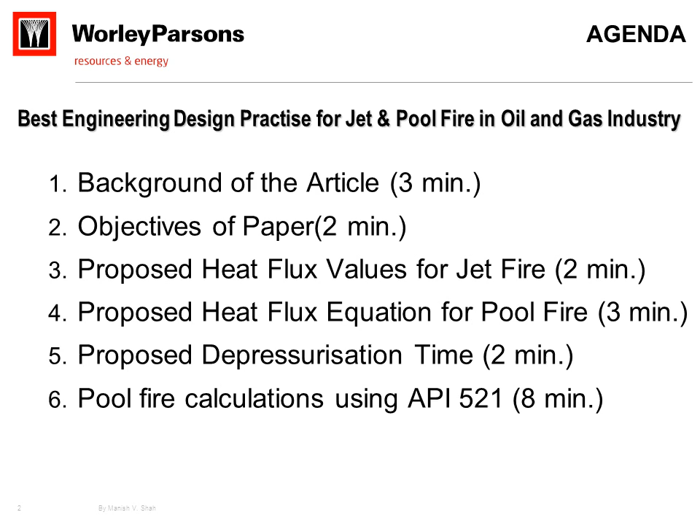Agenda: we will start with background of the article, then objective of the paper, followed by proposed heat flux values for jet fire, proposed heat flux equation for the pool fire, proposed depressurization time, and at the end pool fire calculation using API 521.

These two guidelines discuss the application and the limitations of API 521. So all process and safety engineers need to study both the guidelines as it covers the various safety design aspects for oil and gas units.

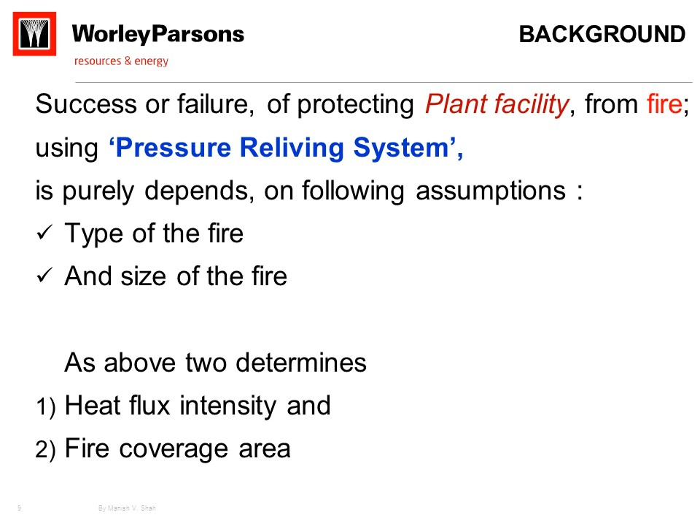The success or failure of protecting plant facilities from fire using a pressure relieving system purely depends on the following assumptions: the type of the fire and the size of the fire, as above two determine the heat flux intensity and the fire coverage area.

API 521 covers the following fire scenario: open pool fire or fuel control pool fire. This is mainly for refinery and chemical plant, which means small to medium size of the fire. In open or fuel control fire, air is in excess while hydrocarbon fuel is limited. Example is fire on open ground.

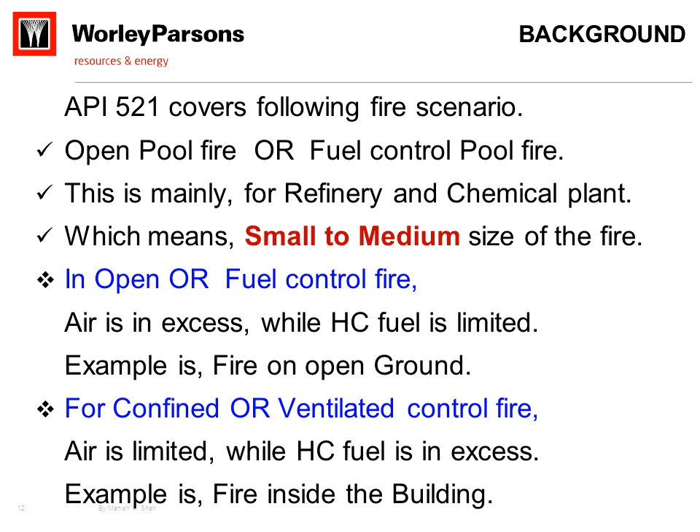For confined or ventilated control fire, air is limited while hydrocarbon fuel is in excess. Example is fire inside the building.

API 521 does not cover the following fire scenarios: confined pool fire, big pool fire, open jet fire, confined jet fire, severe fire or any other fire. For these types of fire, API will not ensure fully safe design, as the failure mechanism, heat flux intensity and the fire area are much different than open pool fire.

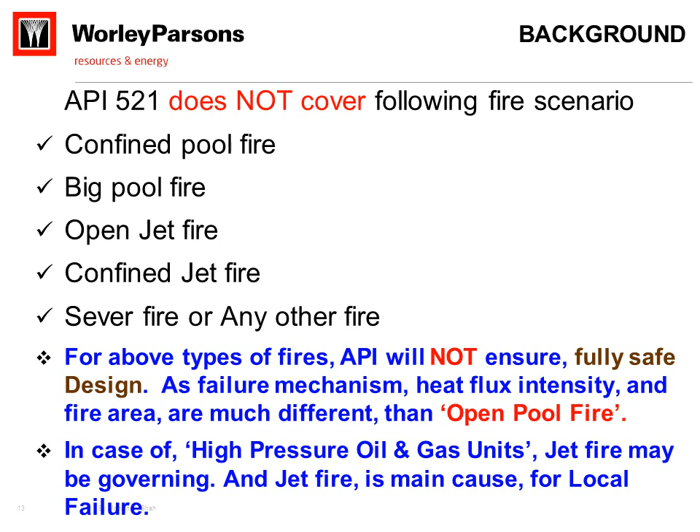In case of high pressure oil and gas units, jet fire may be governing, and jet fire is the main cause for local failure.

API 521 mainly concentrates on overpressure failure and its prevention. API 521 indirectly talks about local failure, but API 521 does not specify any specific requirements for local failure analysis of process components. These process components are vessels and pipes.

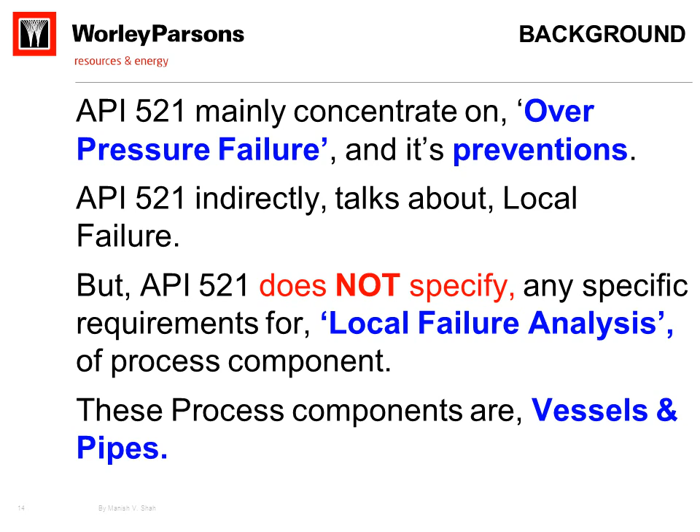Local failure is due to high local heat flux, wherein a component engulfs in the flame of a pool fire or is impinged by the jet flame. The gas process segment or the thin process segment can fail easily due to high local heat flux.

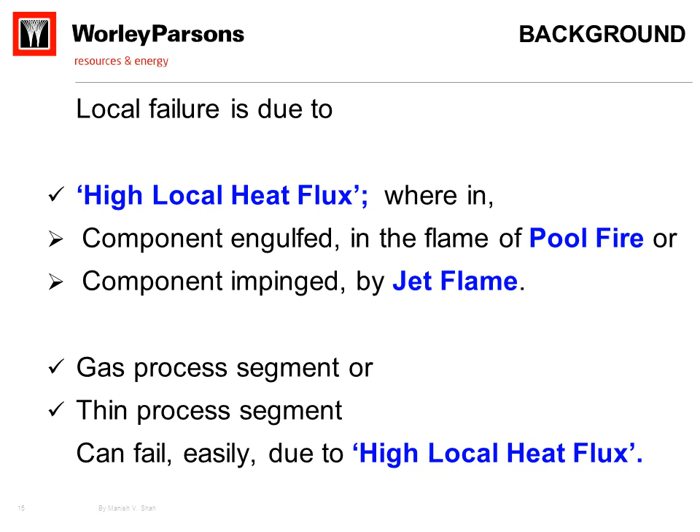API 521 is silent on protecting weak process segments by passive fire protection. These segments are thin pipes, bends, flange joints, pump seals, control valves, abnormal pipe expansion due to the fire.

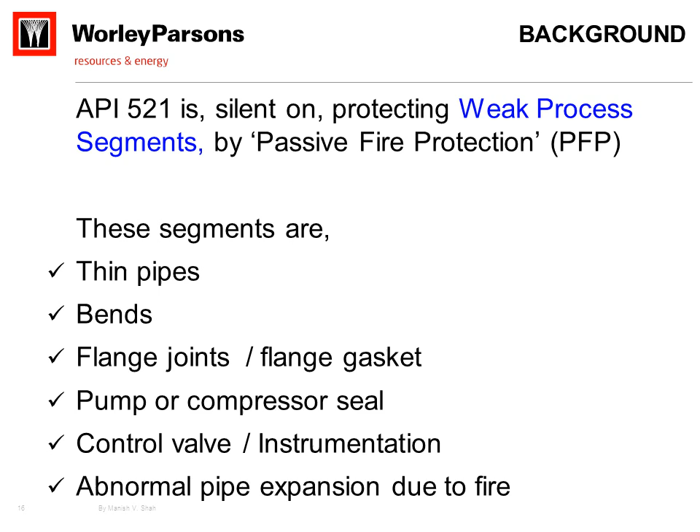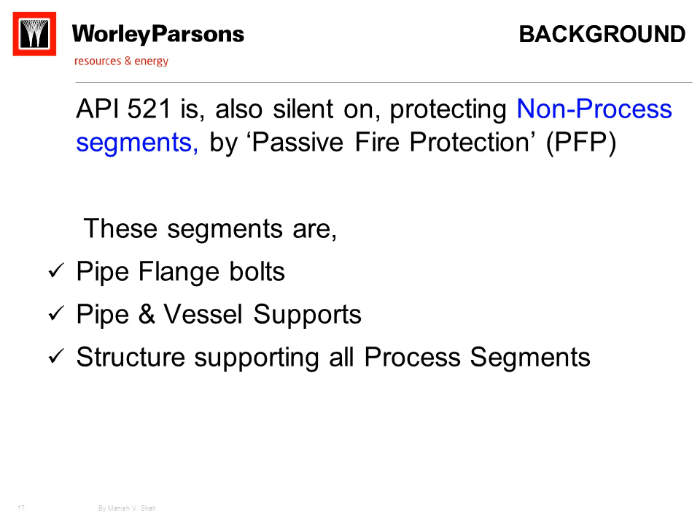API 521 is also silent on protecting non-process segments by passive fire protection. These segments are pipe flange bolts, pipe and vessel supports, and structures supporting all process segments.

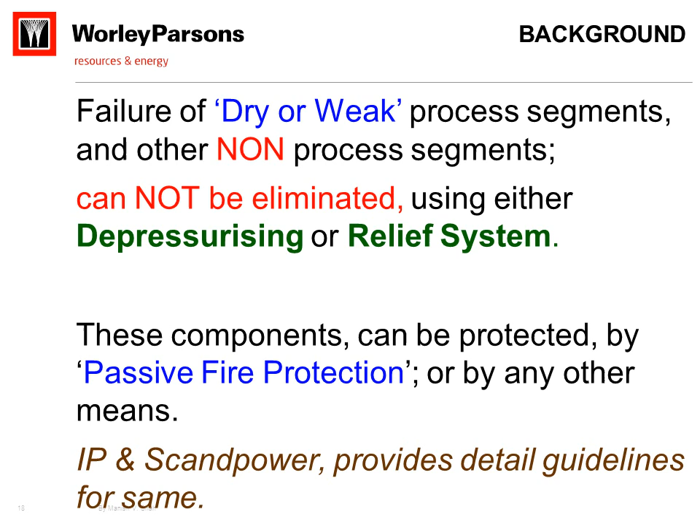The failure of weak process segments and other non-process segments cannot be eliminated using either depressurizing or relief systems. These components can be protected by passive fire protection or by any other means. IP and Scandpower provide detailed guidelines for the same.

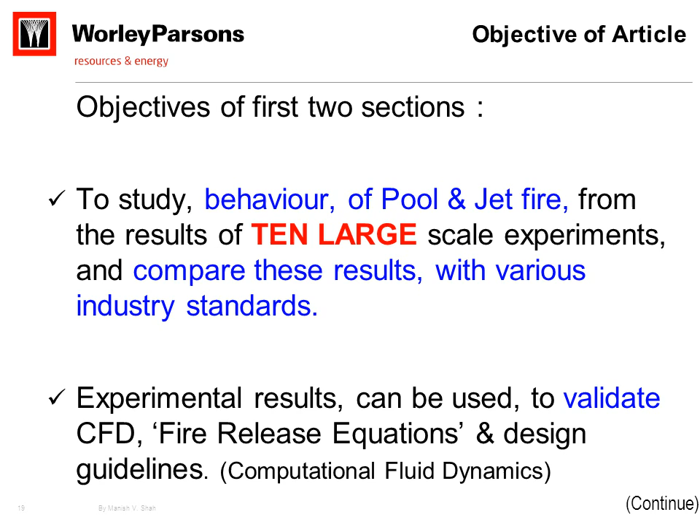Objectives of the first two sections: to study the behavior of pool and jet fire from the results of 10 large-scale experiments and compare these results with various industry standards. The experimental results can be used to validate CFD, fire release equations and design guidelines.

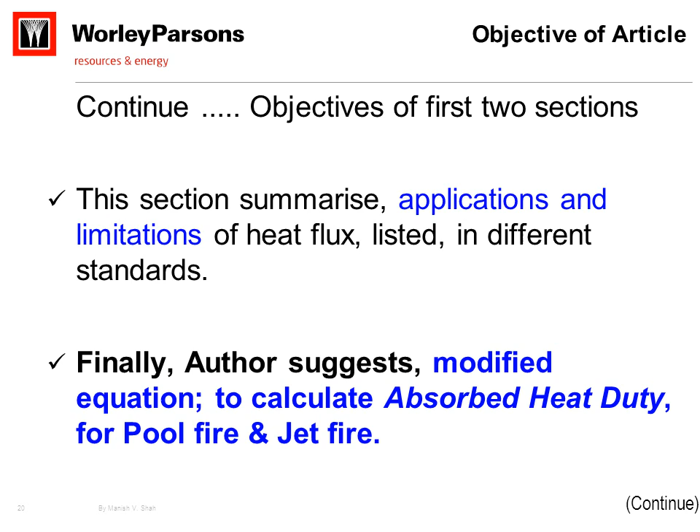This section summarizes the applications and limitations of heat flux listed in different standards. Finally, the author suggests modified equations to calculate absorbed heat duty for the pool fire and the jet fire.

Objective of the third section: understand the requirement of 8 minutes depressurization time as against 15 minutes stated in API 521. Objective of the fourth section: this section summarizes how to use API 521 correctly and effectively.

First section: propose heat flux values for the jet fire. Experiment number 3 for the jet fire.

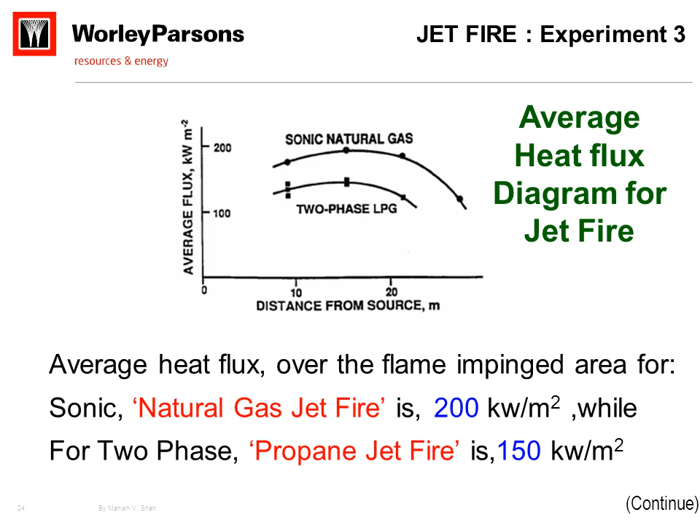Experiment number 10: the jet fire on a horizontal LPG tank. The total average incident heat flux was 170 kW per meter square.

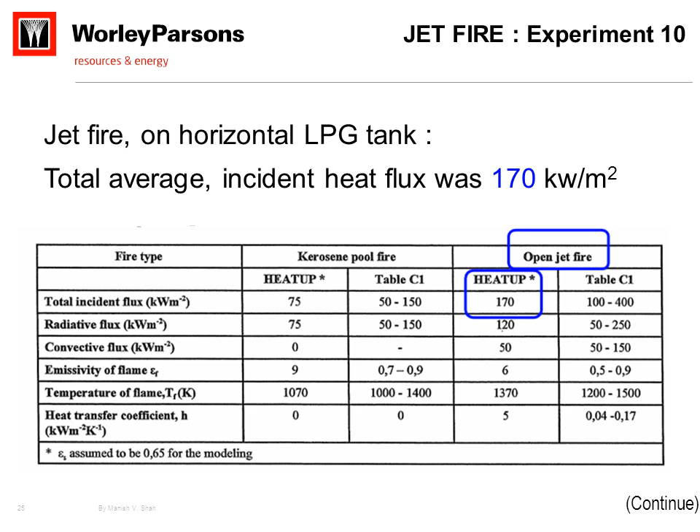As per IP guideline for the open jet fire, heat flux ranges from 100 to 400 kW per meter square. Based on previous experiment, we have chosen 150 kW per meter square. And for the confined jet fire, heat flux ranges from 150 to 400 kW per meter square. Thus, average has been selected as 200 kW per meter square.

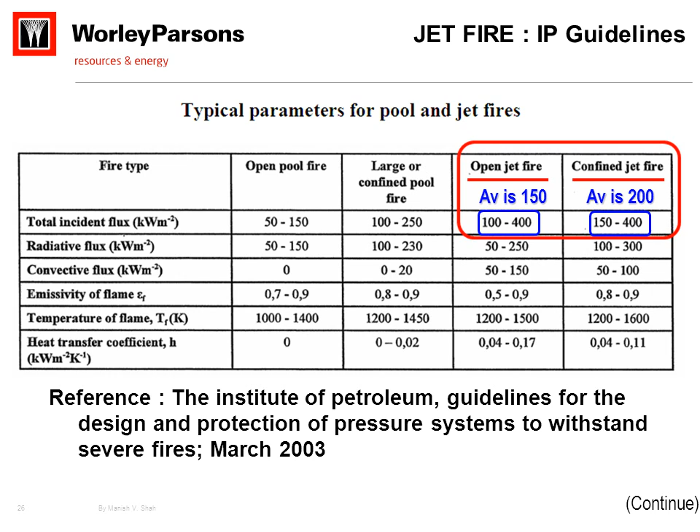Based on experiment number 3, 5, 6, 10 and IP guideline, authors suggest the global average heat flux value of 150 kW per meter square for the open jet fire and a minimum of 200 kW per meter square for confined jet fire.

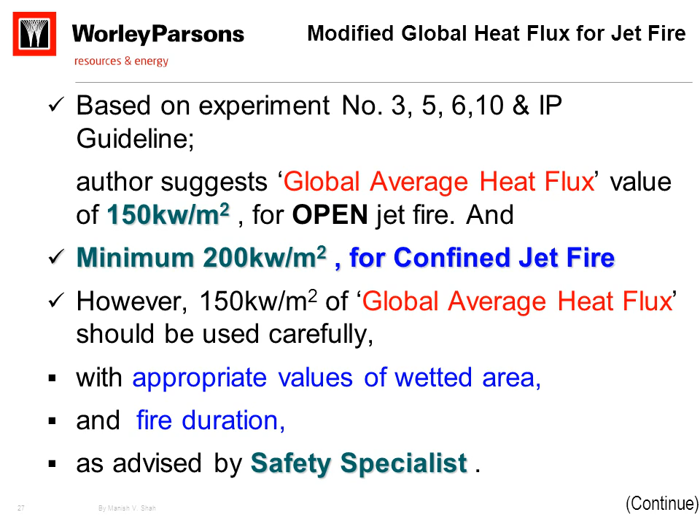However, the 150 kW per meter square global average heat flux should be used carefully with appropriate values of wetted area and fire duration as advised by safety specialists. Alternately, the design consultant shall perform detailed CFD analysis to estimate heat flux distribution.

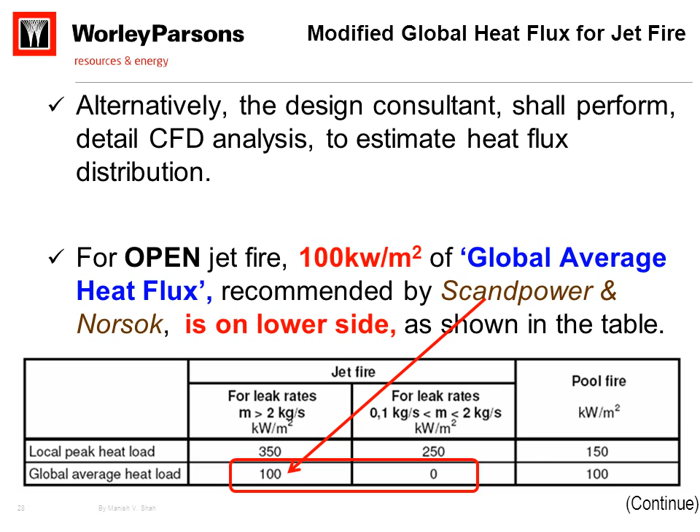Second section: proposed heat flux equation for the pool fire. As per IP guideline for open pool fire, heat flux ranges from 50 to 150 kW per meter square. Thus, the average has been selected as 100 kW per meter square. As per Scandpower guideline for the pool fire, the global average heat load is 100 kW per meter square.

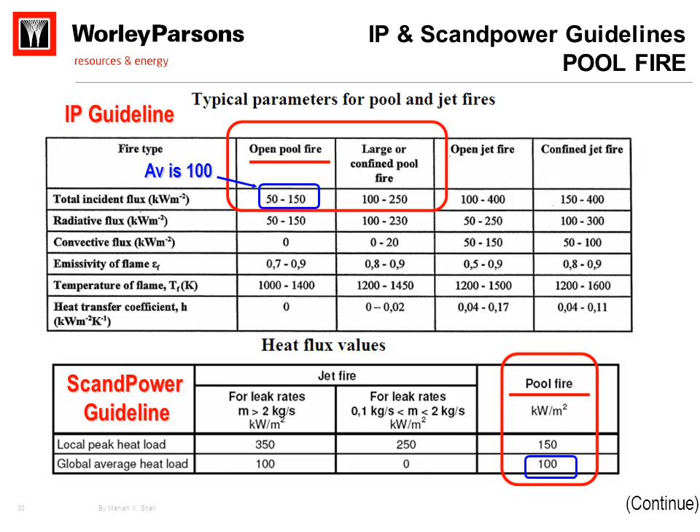Kerosene pool fire on LPG tank. A 5-ton horizontal LPG tank was engulfed in a kerosene pool fire. The size of the pool fire was 4 by 7 meters. The maximum heat flux of 100 kW per meter square was reached within 3 minutes.

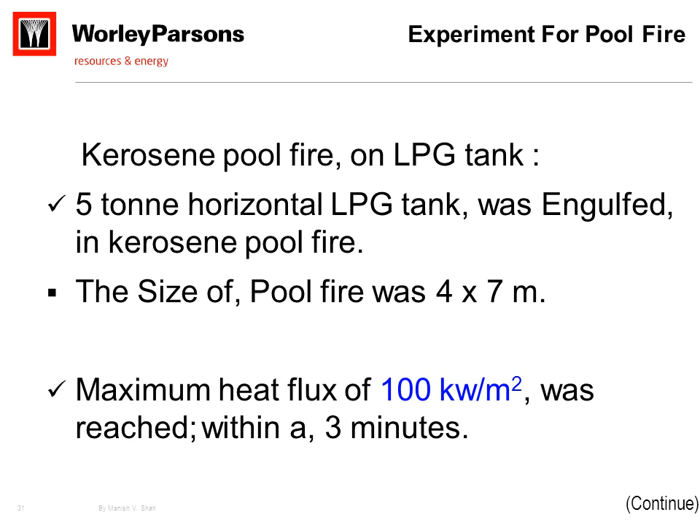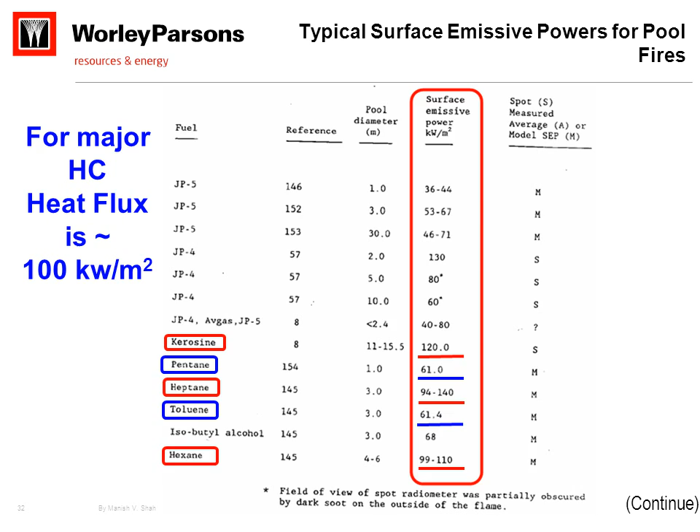For a major hydrocarbon, heat flux is around 100 kW per meter square as shown on this slide. And for refrigerated hydrocarbon, heat flux is more than 200 kW per meter square.

This is the famous API 521 equation for the pool fire, where Q is the absorbed heat duty in kilowatts, C1 is for inadequate drainage and firefighting system, C2 is for adequate drainage and firefighting system, A is the wetted area in meter square, and F is the environmental factor as specified in API 521.

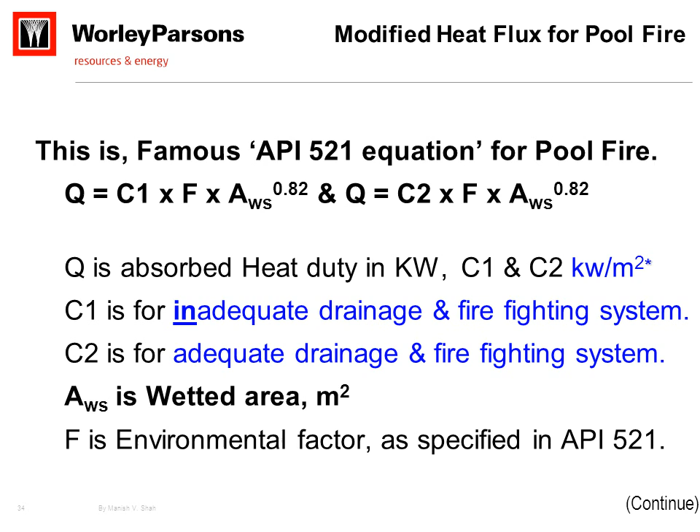Based on experimental result and above guidelines, the proposed constants C1 and C2 for the pool fire and the confined pool fire are as follows. The red value indicates the proposed constant while the blue value indicates the API constant.

The proposed constants are much higher than the API constant. Thus, high heat input to the process unit is expected. Thus, API design may not be adequate at all times.

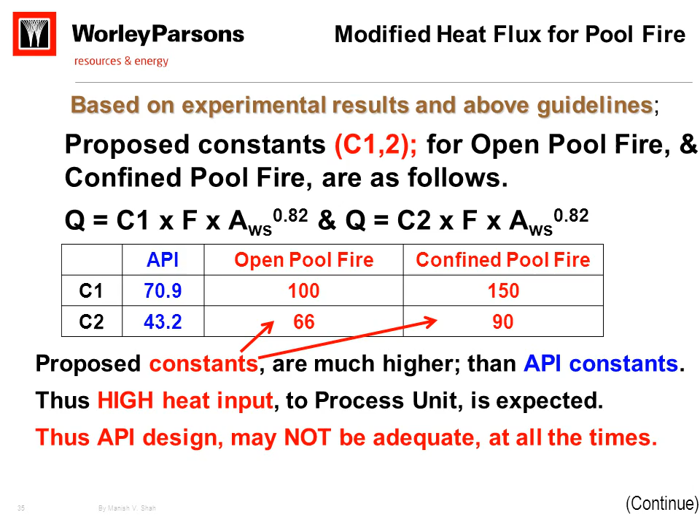Third section: proposed depressurization time for the jet fire and fully engulfed pool fire. The depressurization time as per Scandpower and IP guidelines is only 8 minutes, compared to 15 minutes stated in API 521. Why? The following are temperature contours of kerosene pool fire in a circular bund of 20 meter diameter.

The 800 degrees Celsius contour represents the flame envelope. The equipment and pipes covered in the flame envelope will attain high temperature within a short time and it fails quickly and further becomes a source of fire.

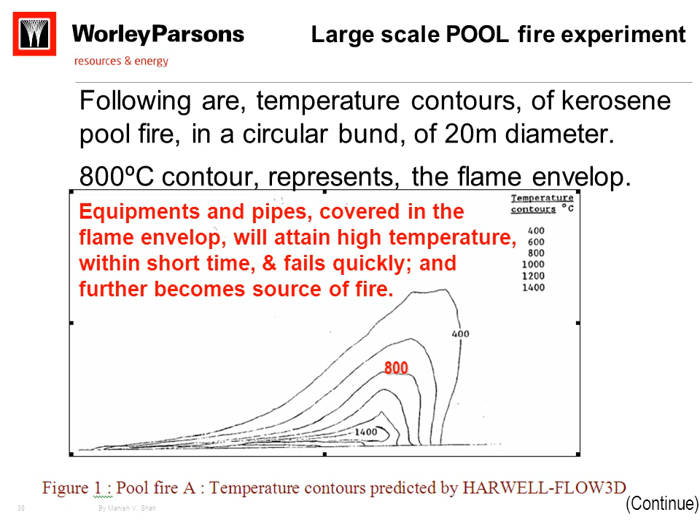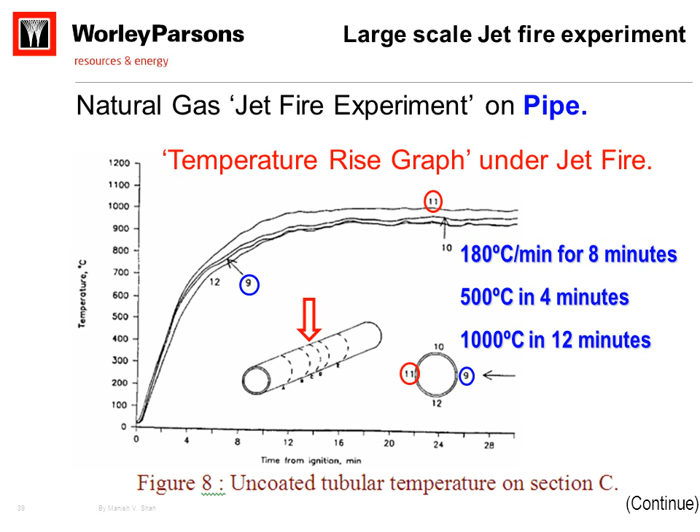The rate of temperature rise for a dry system is 100 to 200 degrees Celsius per minute, and material strength falls rapidly once the temperature exceeds 500 degrees Celsius.

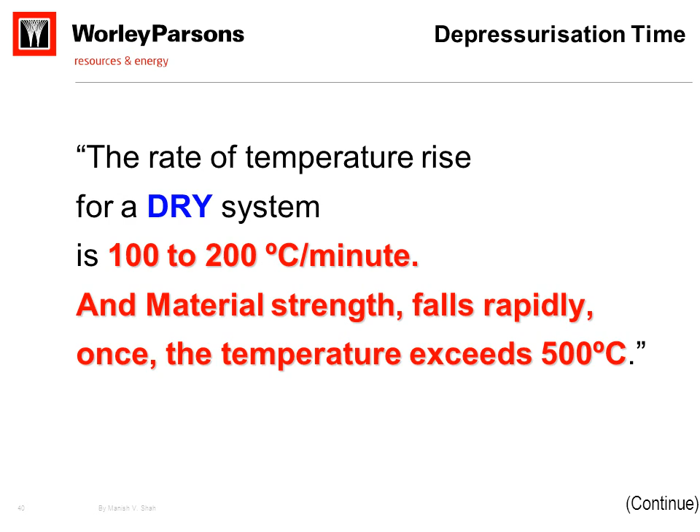As observed in the previous experiment, the metal can attain 500 degrees Celsius temperature within a short time. And weak sections like thin pipes, flange joints, bends and supports may fail quickly under the high temperature of flame as compared to thick vessels.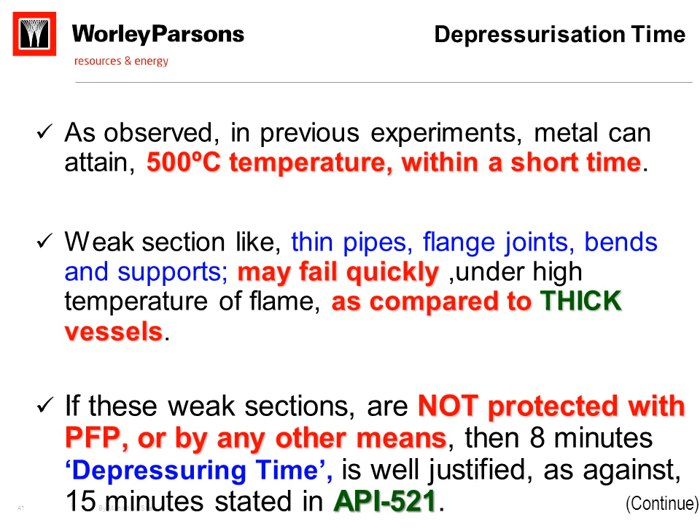If these weak sections are not protected with PFP or by any other means, then 8-minute depressurization time is well justified as against 15 minutes stated in API 521. Otherwise,

Fourth section: pool fire calculation using API 521. Use the API equation to calculate absorbed heat duty.

And average heat flux is equal to absorbed heat duty divided by wetted area. All these constants we have already discussed in the previous section.

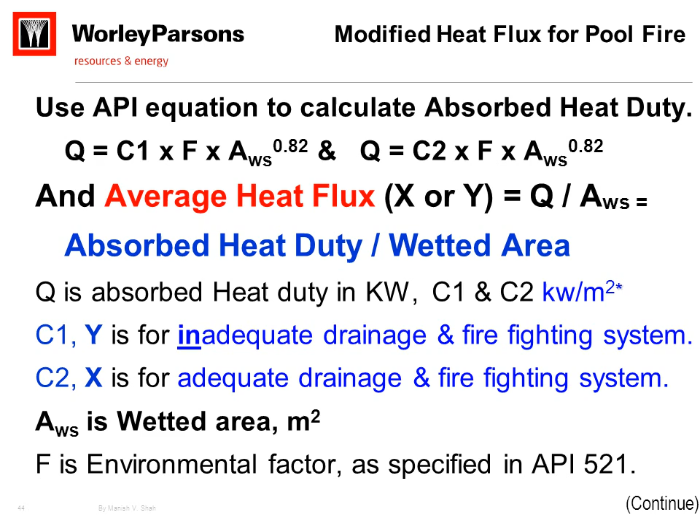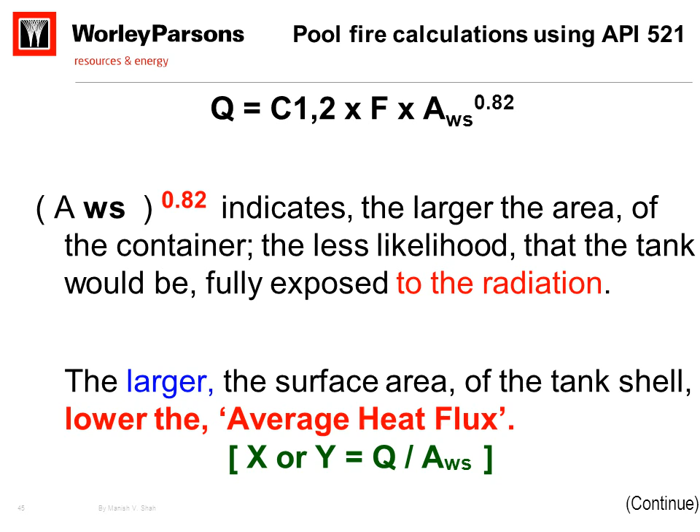The wetted area raised to the power 0.82 indicates that the larger the area of the container, the less likelihood the tank will be fully exposed to radiation. As compared to the top and side sections of the tank, the bottom section sees high radiation. Thus, the larger the surface area of the tank shell, the lower the average heat flux.

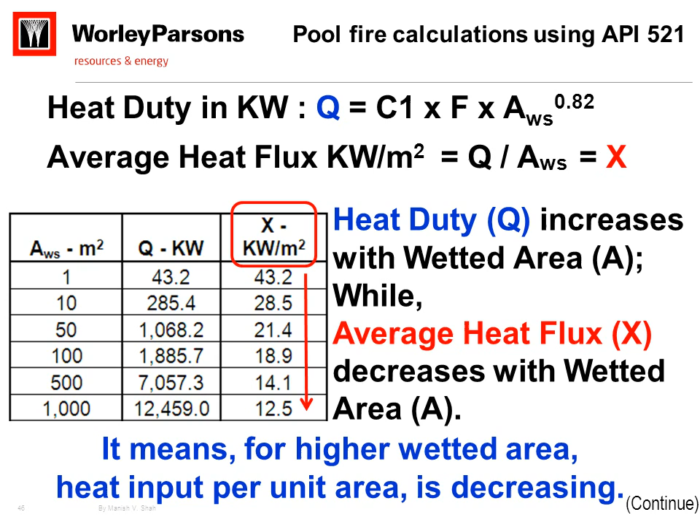From this table, we can clearly see that the heat duty increases with the wetted area, while the average heat flux decreases with the wetted area. It means for a higher wetted area, heat input per unit area is decreasing.

Let us take the example of a single blowdown valve serving two vessels spread over the ground. Each vessel is engulfed individually in the flame and each has 10 square meter wetted area. We can calculate the heat duty by two methods. In method 1, first we calculate total wetted area and then find the heat duty, which comes to 504 kilowatts. In the second method, we calculate the heat duty for each individual vessel and then add all heat duties together, giving 571 kilowatts.

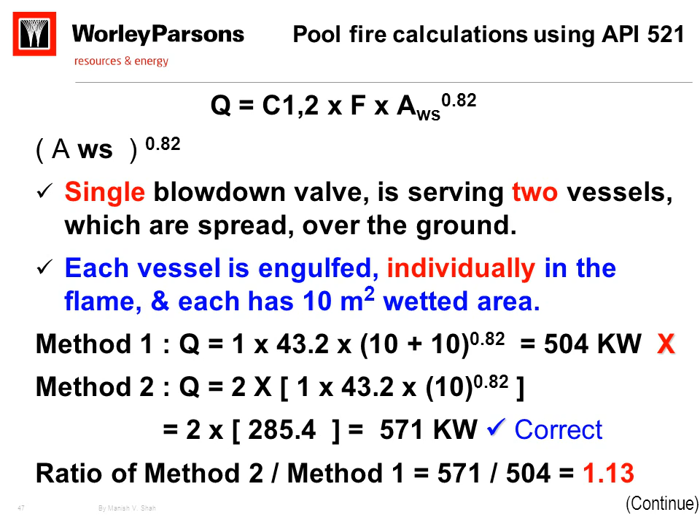In the first method, the total area represents one big vessel, so the heat input is less compared to the second method. Similarly, do not split the wetted area for shell, heads and piping which can be engulfed in a single flame, as this will give a higher heat duty than actually required. Thus, for this example, method 2 is the correct method.

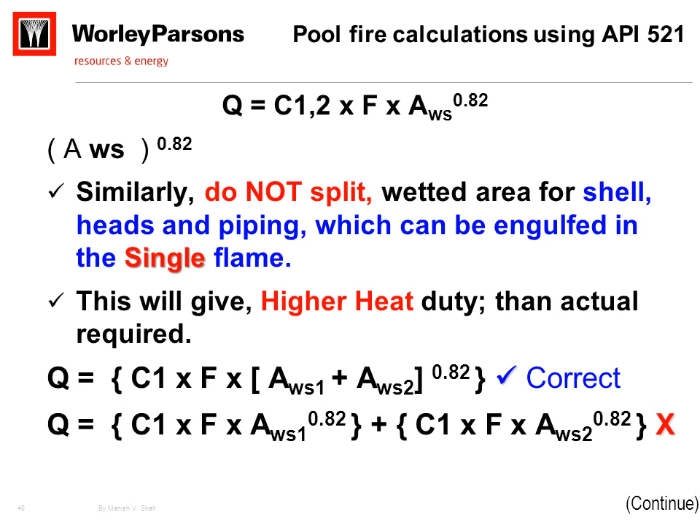In Addendum May 2008, API introduced new constants for air cooler tubes. The C1 and C2 constants for air coolers are much higher than for other API equipment, and the wetted area factor is 1 instead of 0.82, which means high heat input to the air cooler is expected, as the tubes are fully engulfed in the flame compared to other equipment.

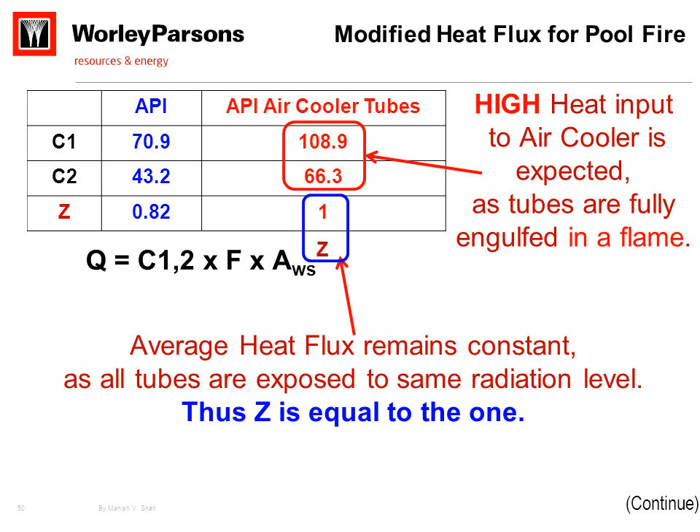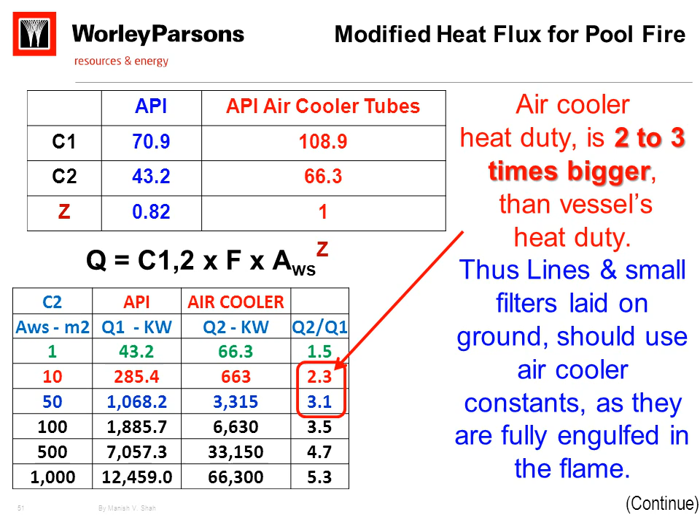The average heat flux remains constant as all the tubes are exposed to the same level of radiation. Thus, Z equals 1. The air cooler heat duty is 2 to 3 times bigger than vessel heat duty. Thus, lines and small filters laid on the ground should use the air cooler constant, as they are fully engulfed in the flame.

Following conservative practices should be avoided for wetted surface area calculations. Application of pool fire for a grated offshore platform should be avoided, as a grated offshore platform cannot hold a liquid pool. Application of pool fire for a gas platform should be avoided, as it does not have any liquid. The wetted area above 25 feet above the pool fire should be avoided. It has been observed that without checking equipment elevation, wetted area is calculated for heat duty.

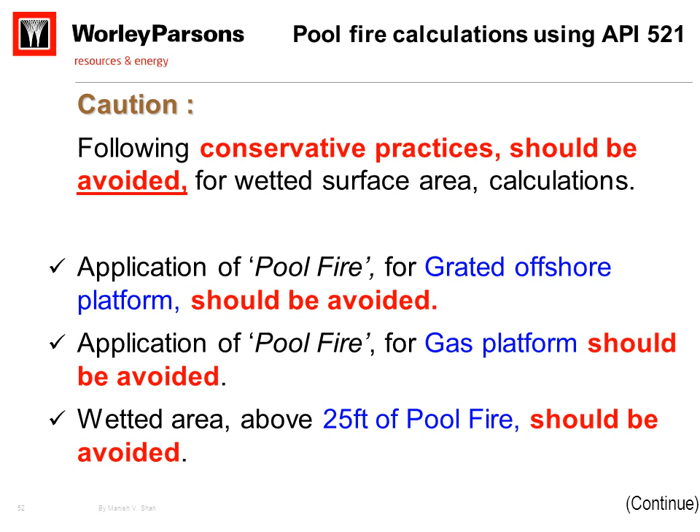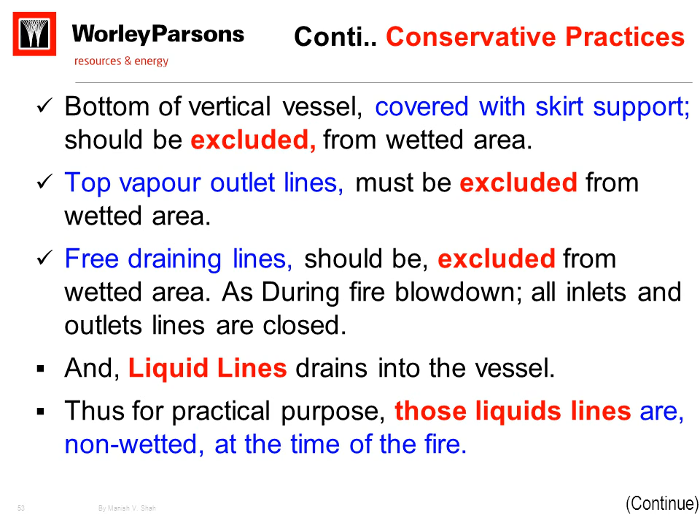Similarly, the bottom of a vertical vessel covered with skirt support should be excluded from the wetted area, as fire cannot reach the bottom of the vessel under the skirt support. The top vapor outlet line must be excluded from the wetted area. The free draining line should be excluded from the wetted area, as during a fire blowdown all inlet and outlet lines are closed and liquid lines drain into the vessel. Thus, for practical purposes, those liquid lines are non-wetted at the time of fire.

Heavy crudes, high boiling liquids. For heavy liquids, simulation may not show any boiling at relieving pressure. This will be misleading. There are two possibilities for high boiling liquids. First, instead of liquid boiling, liquid can start cracking into light gas and overpressure the vessel. The appropriate condition for cracking should be considered to find the vapor release load.

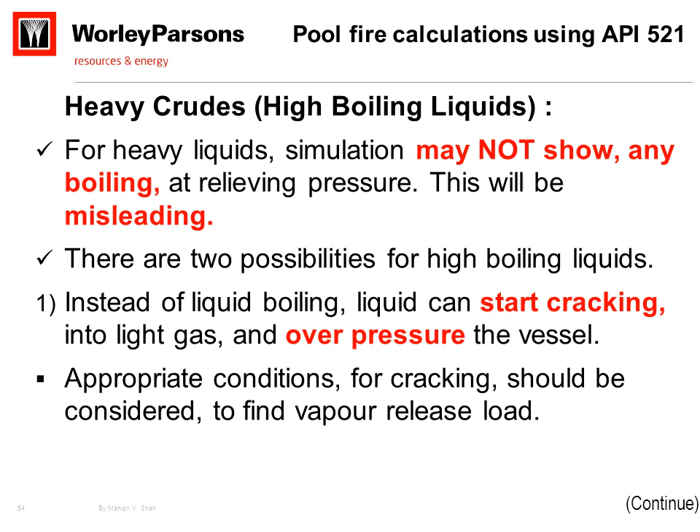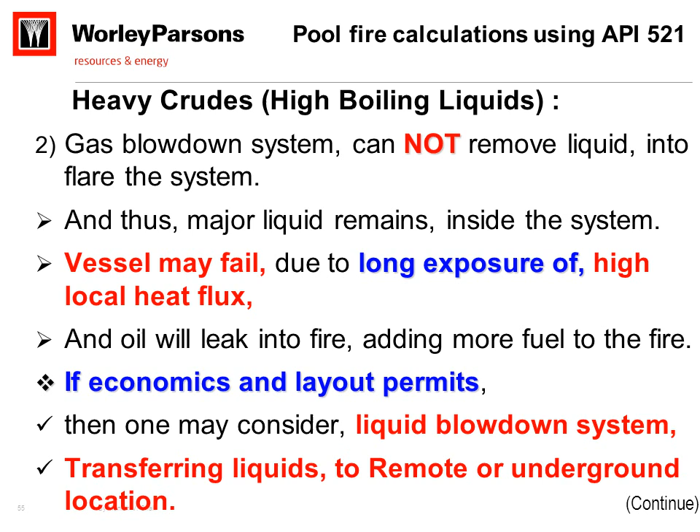Second possibility, the gas blowdown system cannot remove liquid into the flare system, so the major liquid remains inside the system. The vessel may fail due to long exposure of high local heat flux, and oil will leak into the fire, adding more fuel to the fire. If economics and layout permit, one may consider a liquid blowdown system transferring liquid to a remote or underground location.

Wide versus narrow boiling liquid. Sizing of the relief device for wide boiling liquids is different, as the latent heat of vaporisation and gas molecular weight vary significantly over time, while for narrow boiling liquids both remain constant. Thus, for wide boiling liquids in large quantity, a series of flashes shall be considered over the fire duration, and the practical conservative case should be considered for PSV sizing.

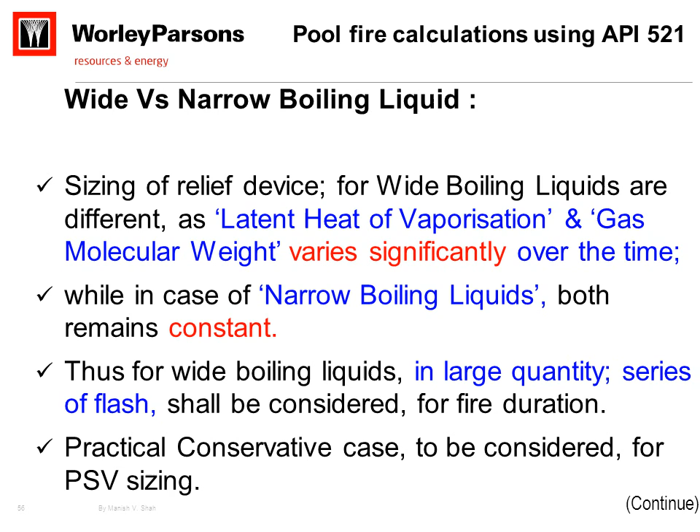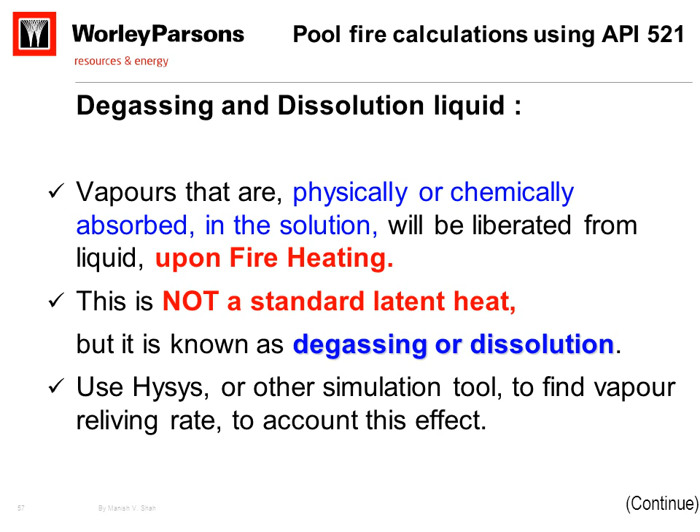Degassing and dissolution liquid. Vapors that are physically or chemically absorbed in the solution will be liberated from the liquid upon fire heating, and this is not standard latent heat, but is known as degassing or dissolution. Use HYSYS or other simulation tools to find the vapor relieving rate to account for this effect.

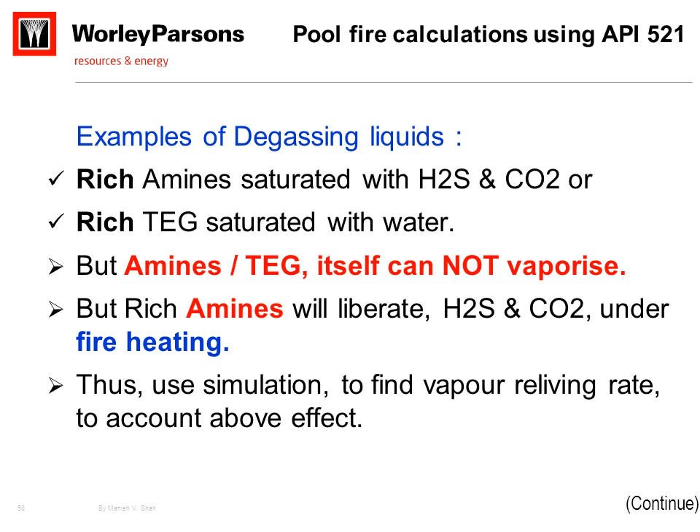Examples of degassing liquids: rich amine saturated with H2S and CO2, rich TEG saturated with water. The amine or TEG itself cannot vaporize, but rich amine will liberate H2S and CO2 under fire heating. Thus, use a simulation tool to find the vapor relieving rate accounting for both effects.